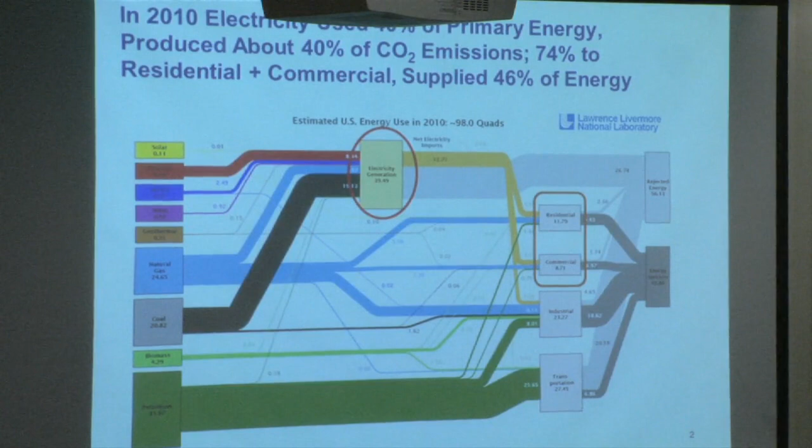What I want to do today is to talk about the essential features of these systems. I'm guessing most of you haven't had a course in power systems, since MIT doesn't teach a course in power systems, really. And talk a little bit about the regulatory regime. Monday we'll look forward. What are some of the challenges? What are some of the opportunities? What are some of the policy issues? So let's talk about the power system.

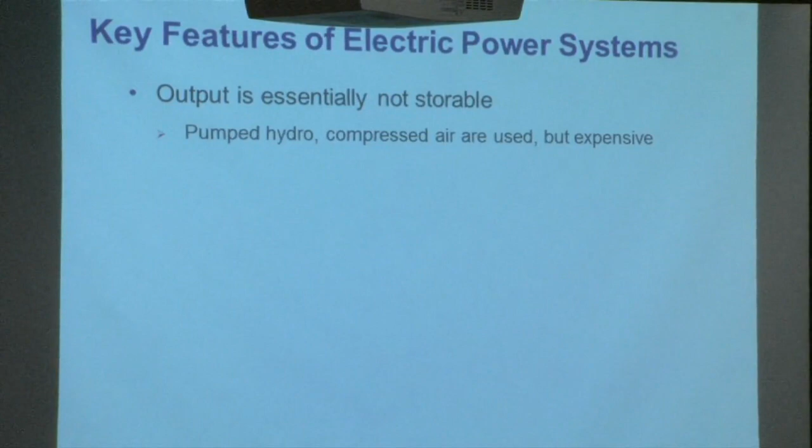The one thing you really do have to keep in mind is, despite all of the interest in storage, and everybody talks about storage of electricity, as a practical matter, you simply can't store electricity in bulk at a reasonable cost. You can pump water uphill and use pumped hydro, and that's pretty good. That's pretty efficient. It's very hard to build new pumped hydro sites. There's one in New England. There are no plans for any others.

And as we'll see next time, the value of storage goes up over time. You can also pump air underground, and there are like 2 of those in the world. And there's a lot of research into batteries, but so far nothing looks cheap. So at the moment, the system operates effectively without storage. And this matters because demand varies over time in ways that aren't perfectly predictable.

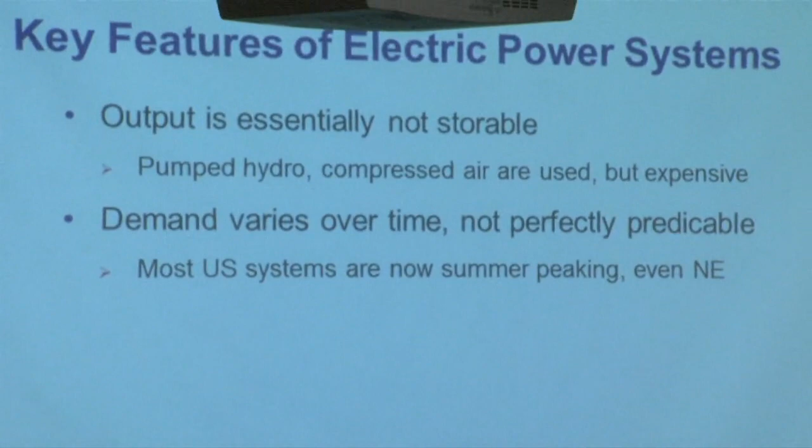Here's some seasonal variation. This is a forecast for New England, and you'll see that, as it says there, week 8 is late July. Week 8 was forecast to be the peak, and week 32, which is that sort of secondary peak, is early January. Most American systems now look like that. They peak in the summertime. That's air conditioning. There's also a good deal of variation. So you have to follow that load. You have to follow that variation in demand.

But hour by hour, there's a lot of variation. And that's sort of an interesting, does the laser work? No, okay, how long are my arms?

That's sort of an interesting, that's last week for New England. And you'll see, first of all, that the load in this relatively uneventful April week varied within a day between 9,000 and just about 16,000 megawatts. That's fairly substantial. You'll see April 2nd was a Monday, so you can see demand is higher during the week than the last 2, which are the weekends.

You'll also see the distinctive feature. There's sort of a morning peak and an evening peak. Most days, again, focus on the actual load, the blue, the evening peak is the higher. And the minimum occurs in the middle of the night, not too surprisingly. But the system has to track that.

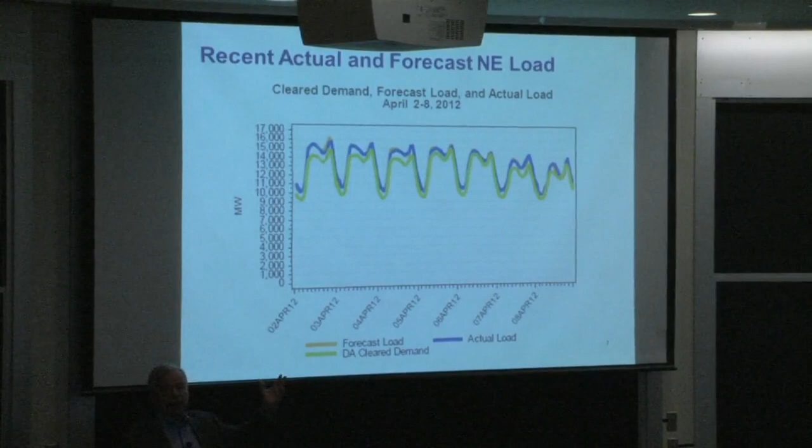What else to say? Any comments or questions so far on this? Yeah, Jacob?

Well, it's got to be made up. The question is, that's a day ahead. The actual load tended to be above the day ahead, which suggests, well, if this were the summertime, I'd say this suggests warmer than expected, which is sort of what it was that week. You get better at forecasting the weather as you get closer. So an hour or two ahead, it's not like, oh my God, right now we've got to make a change. But you may have a few hours warning that it's warmer than we thought, so we really have to ramp stuff up. But yes, something has to follow that load. Could be hydro, could be gas turbines.

It's not going to be big coal plants, because as I'll come to in a minute, following load with big coal plants is very expensive. There's a lot of stuff you get hot, there's a lot of stuff spinning, and to let that cool off and or slow down and then bring it back wastes a lot of energy. So you want things that are quick, that don't have a lot of parts, a lot of rotating mass, and that don't have a lot of stuff that you have to heat and then reheat.

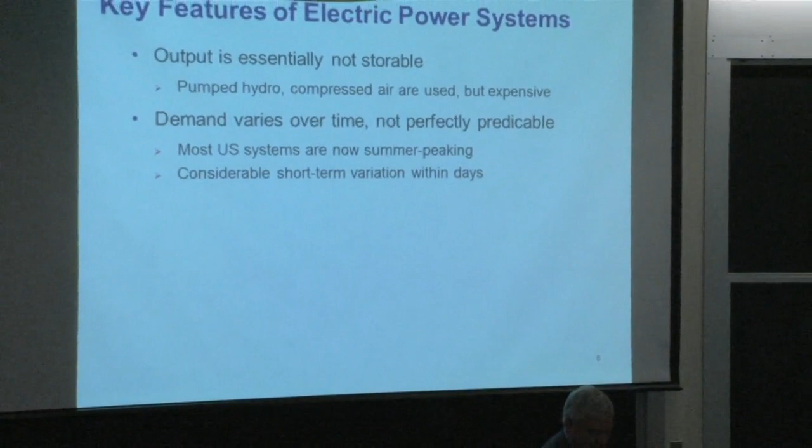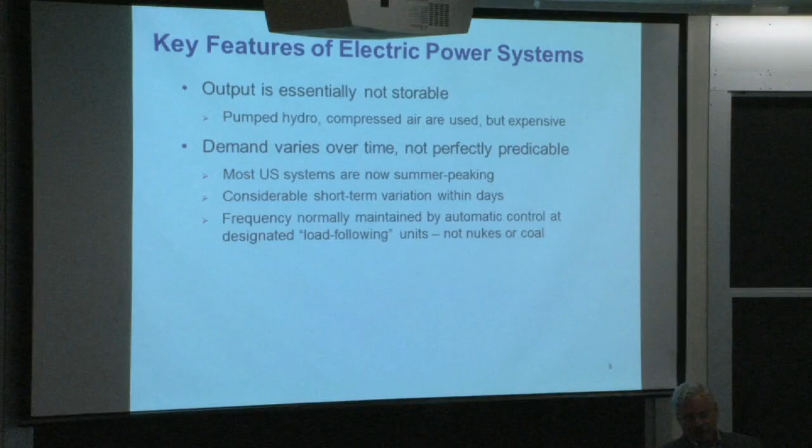That's a forecast outcome, and I just don't know how far in advance, but it's clearly by the regional authority that runs the system. And actual load is what actually happened when you turned on your computer. So, okay. Short-term variation. Minute to minute, the frequency, right? All your equipment, your appliances assume that you'll be getting electricity that varies 60 cycles a second. That frequency has to be maintained, and it's mainly maintained by automatic control at designated units. But when you get big changes like that, governors aren't going to do it, and you will need to bring units on and off.

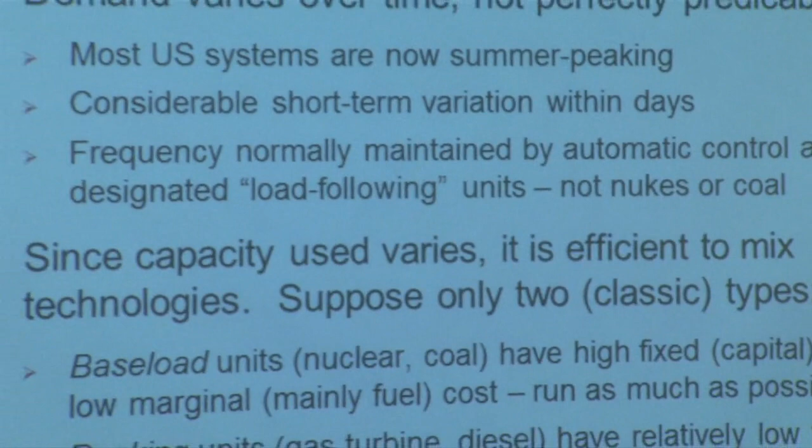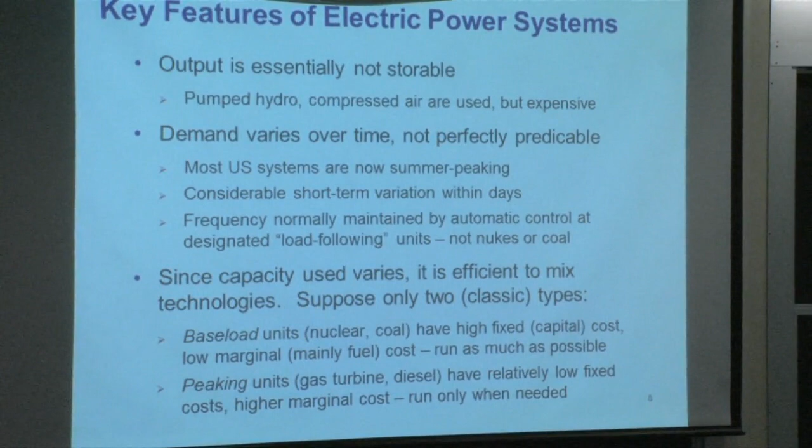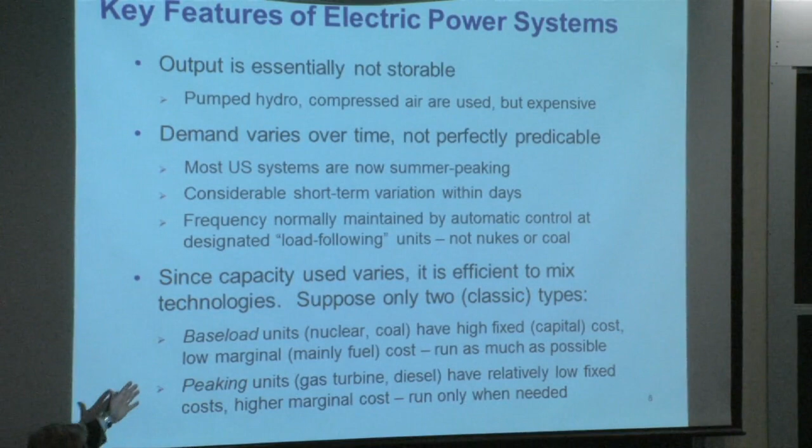So let me talk about technology mix. We mentioned a little earlier that you have fast responding generating units, turbines say, or diesels, to respond to short-term variations in load. But even if you could forecast the load, you would want units like that. As I mentioned, it's expensive to vary the output from what are called baseload units, nuclear power plants, big coal plants. But not only that, when you run them flat out, they have very low running cost. Nuclear, virtually zero. Coal, pretty low. But they're very expensive to build, these big units. The little units, peaking units or intermediate units, but let me just assume two kinds. Think coal plants and gas turbines. Turbines are cheap to build, but they're expensive to run, relatively, on today's prices.

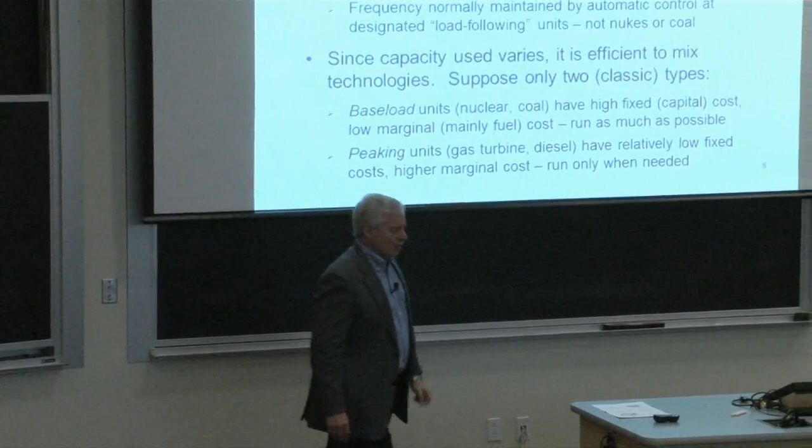So since load varies, you're not going to run your whole fleet all the time, right? If demand were constant, but for environmental issues, you'd just build cheap coal plants, cheap nuclear plants, if you could find one, combined cycle plants and run them all the time. But since the load varies, you know that you're not going to run your plants all the time. So what do you do? Imagine two plants of the same capacity. One is a peaker, let it be a gas turbine. And the other is a base load, let it be a coal plant. They don't tend to have the same capacities, but for the sake of argument, suppose they do.

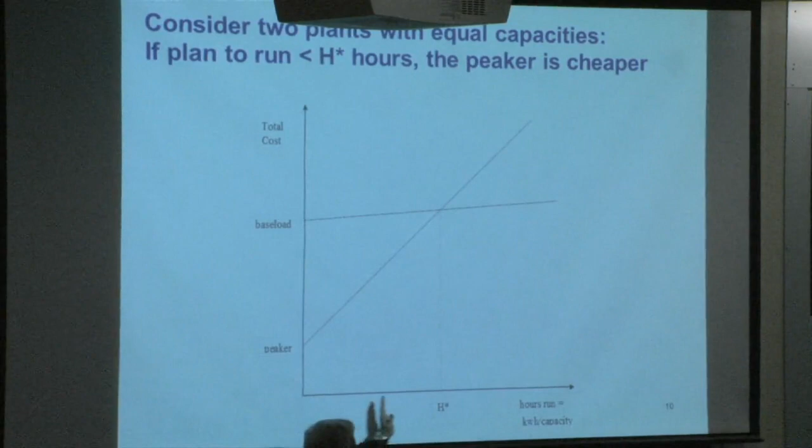You ask, what's the total cost of this plant? The total, the more hours you run it, the larger will be the fuel cost as a component of total cost, right? So the total cost consists of the cost of building the thing, basically taken down to, say, a per day cost or a per year cost. And then the slope is the marginal cost of running it. So the height gives you the total cost.

If you're going to run all year long, then the base load plant is the plant to build. Because, you know, way out here, the fact that the fuel is cheap makes up for the capital cost. But if you're only going to run it a little bit, but you have to have it, then you want to build a peaker. Right? That notion clear? The fact that there's output variation means you want to have plants of multiple types.

If you can get a baseload plant to run almost all the time, or all the time, then you're in great shape. But if you have to have plants that run only a little bit, only a few hours per year, then you've got to have some of these. And you've always got that mix. We're going to talk about wind and solar next time. They don't quite fit either of these categories, if you think about it for a minute. But if that's clear, then let's look at this.

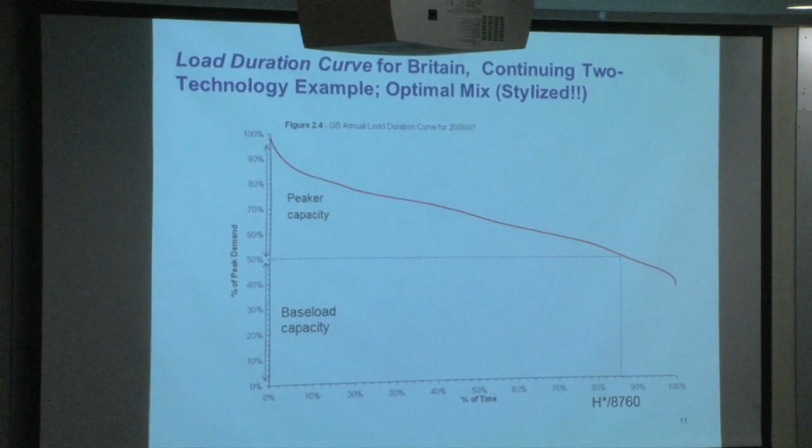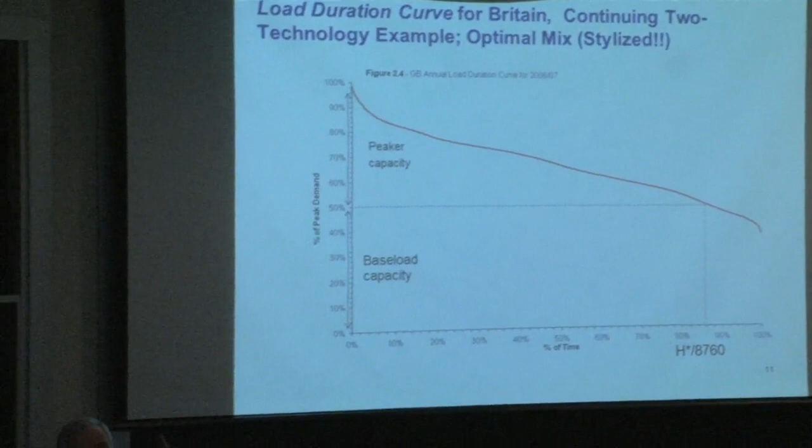The red curve is what's called the load duration curve. And it's the actual curve, because I happen to find it, for, it's probably England and Wales, it says Great Britain, for 2007. What a load duration curve is, you look at how much electricity was consumed hour by hour, and you basically convert those to a graph, putting the hour with the highest consumption here, then the second highest there. You basically stack it up.

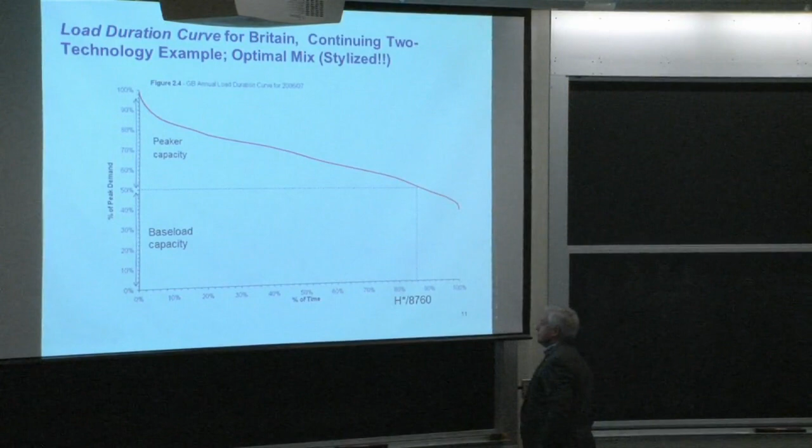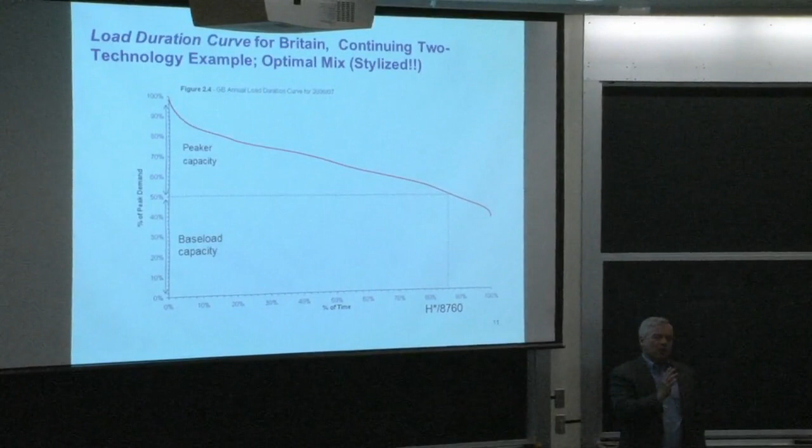So out here at 100%, you have the consumption, the demand, and it's expressed as a percentage of peak to keep life simple. The percentage of peak demand at the lowest hour of the year, presumably 3 o'clock in the morning on some day that was neither hot nor cold, so nobody needed to run any HVAC, and it was a holiday, so there was no industrial work going on, whatever.

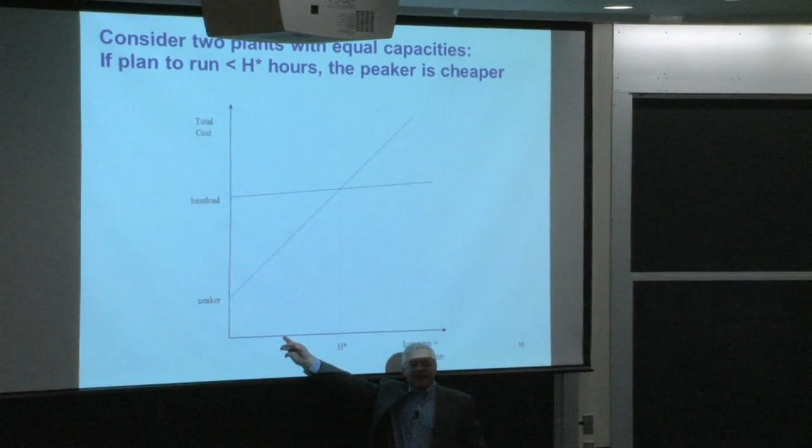So if you go back to this picture, it says, if you're going to run a plant fewer than H star hours a year, it's going to have to be a peaker. It should be a peaker rather than a base load. Come to this picture, and you say, okay, let's suppose, just because it fits the picture, that there are 8,760 hours in a year. This is like 42 gallons in a barrel, another one of those numbers you have to have, 8,760 hours in a year.

Let's see if I can do this. If you build baseload capacity up to this line, you know that it will be running at least that fraction of hours. You'll have to cut it down somewhat in the really low hours. But if you build that much baseload capacity, it will run for at least this many hours because demand exceeds that capacity for that fraction of the year. Right?

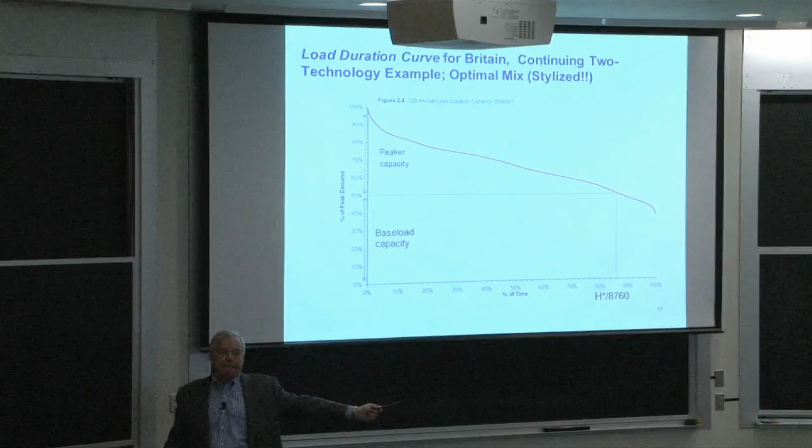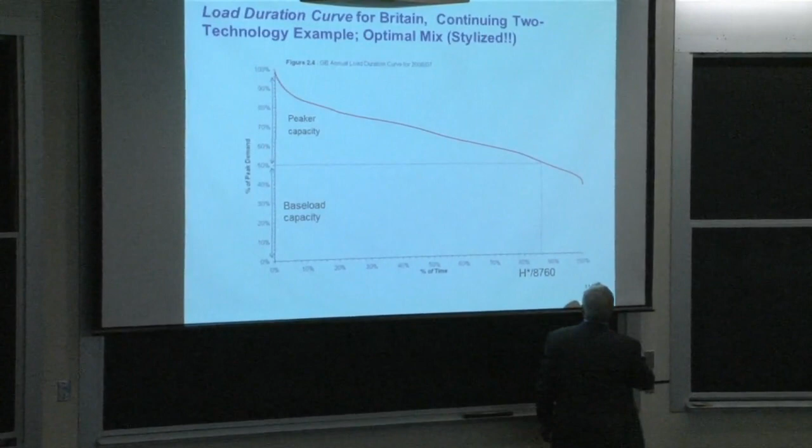So we're asking, you decide what you want to build in terms of baseload capacity as a fraction of the peak, read across to the curve and come down. And you get the fraction of hours of the year when demand is at least that high. Right? So we've normalized the load duration curve so the peak is 100. We also normalized time, which is kind of awkward, so that 8,760 hours equal 100. So we can do percentages.

So again, this is just stylized, but if H star over 8,760 is here, then that says you build half baseload capacity and half peaker capacity. Right? The peakers are only going to come into play when demand is above, and this is where I need the laser, above that 50% point. That's an artifact. This is stylized. 50% has no particular significance in life. It just works out in this picture. So you'd build half peaker capacity and half baseload.

The peak units would be on for less than H star hours a year, or less than this fraction of hours per year. Does that make some sense? You see why you need the mix, and this is just mechanical to say if I know where the break point is, then I can say what fraction of the year.

I got to use the load duration curve to go from the break point where I decide between the different technologies, the base load and the peaker in this case, and to get a capacity mix out of that. For what fraction of the year, blah, blah, blah.

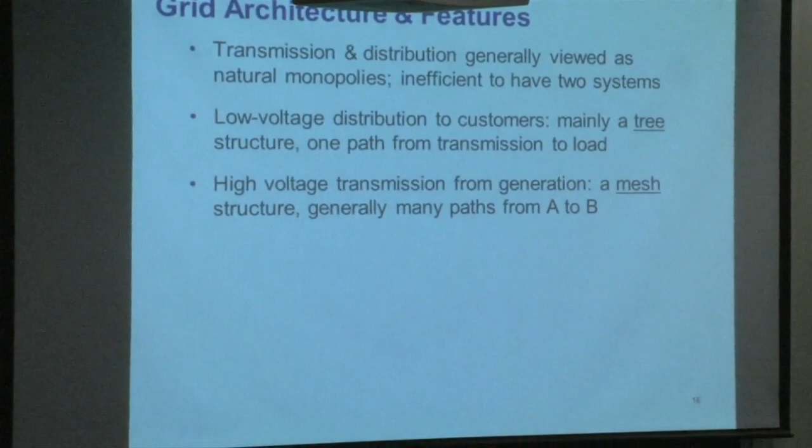In terms of the architecture, let me just, I don't know why this is a blackboard talk, but when I say that low voltage distribution systems are a tree, there'll be a substation and feeders go out.

To serve neighborhoods and houses and so forth. The transmission system, I'll show you a map in a little bit, but you might have a generator here, you might have a city or load here and load there and another generator here. The transmission system will be a mesh. It's a different architecture. It means there are multiple paths.

In the tree structure, you'd have a substation, and this would be a house. There's only one path. Here there are multiple paths, in this case 3, from this generator to this load. The reason for multiple paths, of course, is reliability. The reason for a tree structure is cost. In some dense urban areas, the distribution system is a mesh because the lines are short, and you might as well. But if you think of any rural or suburban area, it's a tree.

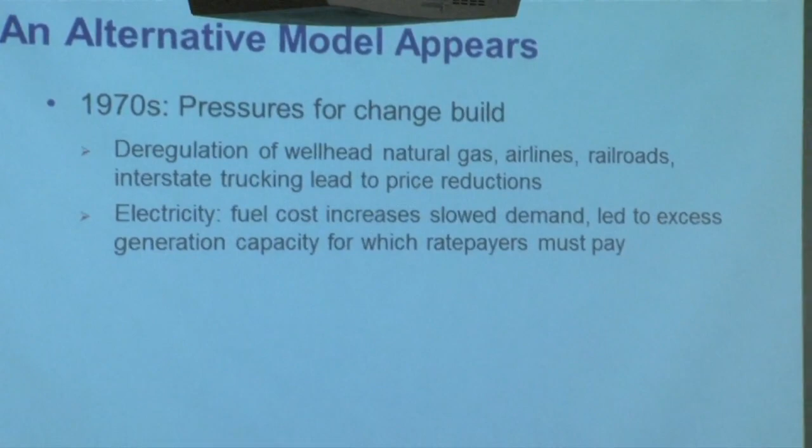What's avoided cost? Well, each state got to determine that. Big mess, there were no markets. But an interesting step. Early 80s, and I will cite myself here because I do tend to get cited for this. In the early 80s, Paul Joskow and I were working in this area, and we began to hear from people in the Reagan administration: all this other stuff worked. We deregulated gas and trucking and airlines. Why don't we just deregulate electricity? Why don't we just let the market determine electricity prices?

I have to say, the words natural monopoly came to mind. You're not going to have competition in transmission. You're not going to have competition in distribution. But you could have competition in generation. It's not like there's only one generating plant per city or per state. There are a bunch of them. So maybe you could. So we actually wrote a book called Markets for Power that people tell me was influential more outside the US than in.

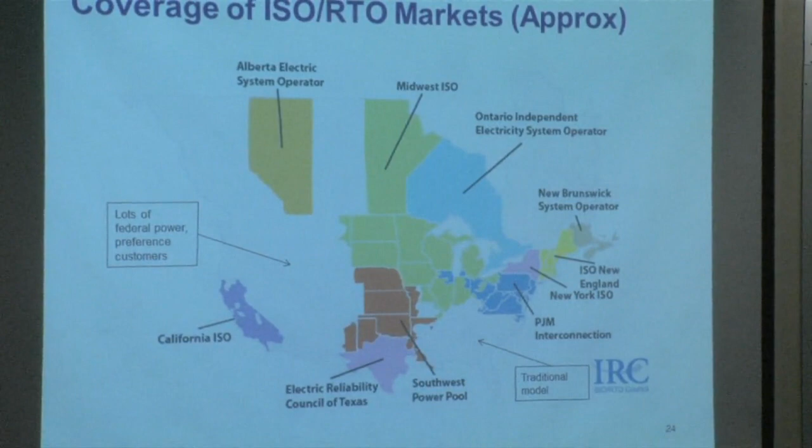In England and Wales, it's the core European Union policy. All these state-owned monopolies are moving toward markets dramatically. And about 2/3 of US consumers are served by markets. This is the picture. The colored areas are roughly, they change slightly over time, roughly the boundaries of organized wholesale markets. So in New England, I showed you these day-ahead clearing demands, and I'll show you some prices in a little bit.

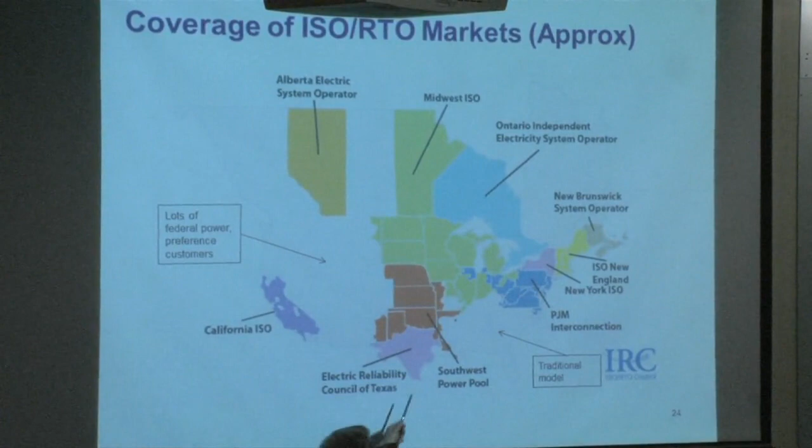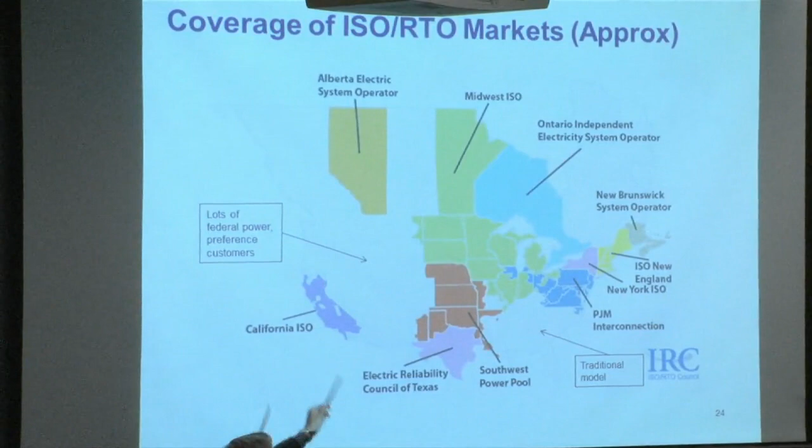This part of Texas runs a very nice market. California, after a while, restarted. This part of the country is traditional, vertically integrated. We generate, we transmit, we distribute. What's a market? Utilities. In the West, the federal government has a huge presence, operates a lot of the transmission system. There's sort of elements of market, but not really. And there's an awful lot of preference power because there's a lot of government-owned hydro. If you go up the Columbia River, you pass dam after dam after dam, which you all own.